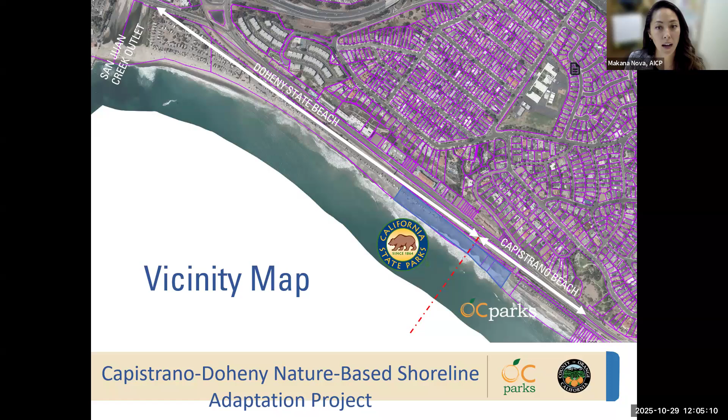So this is a joint project between the two agencies. There's also the San Juan Creek outlet that comes through here, so what comes through the watershed is outletted and comes down coast through this area. Finally, in blue, here is the project area. It's a 1,150 linear foot stretch of beach where this nature-based shoreline project is envisioned. The red shows the property line.

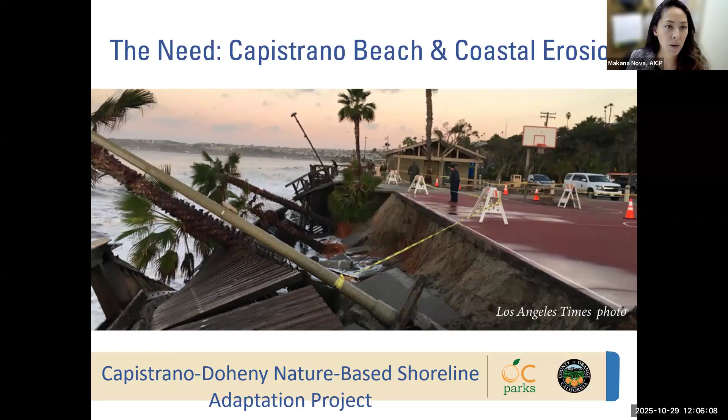And then here is the Nature-Based Shoreline Project area and what the erosion looked like back in, this is about 2021, 2022. You can see that there were some really beloved palm trees that have been lost in this area, and the amount of erosion that has occurred. This is looking southward in that area where we lost some parking. And then we also have storm drain facilities that were exposed due to this erosion.

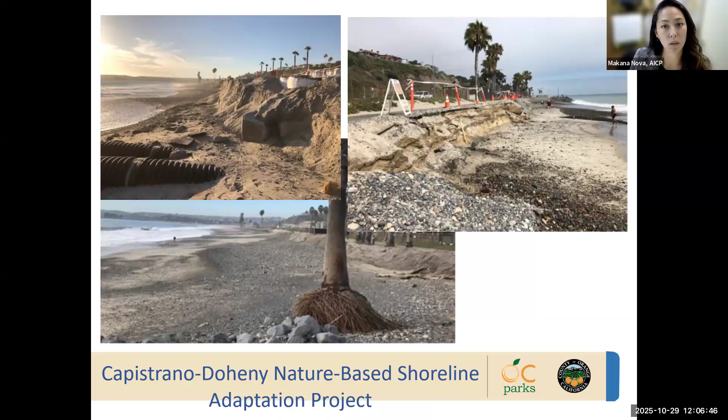So there's a lot of critical infrastructure through this area. I was just highlighting some of the storm drain facilities. You can see the parking lot in the aerial here. The main entrance comes down through Palisades Drive into Capistrano Beach. There is a pedestrian and bicycle path that is very well utilized that follows through this area down north into Doheny State Beach. And then we have the rail line, the LOSSAN rail line, and then Coast Highway behind it. So if this coastal erosion continues at its current rate, we stand to lose a lot of very critical infrastructure in this area.

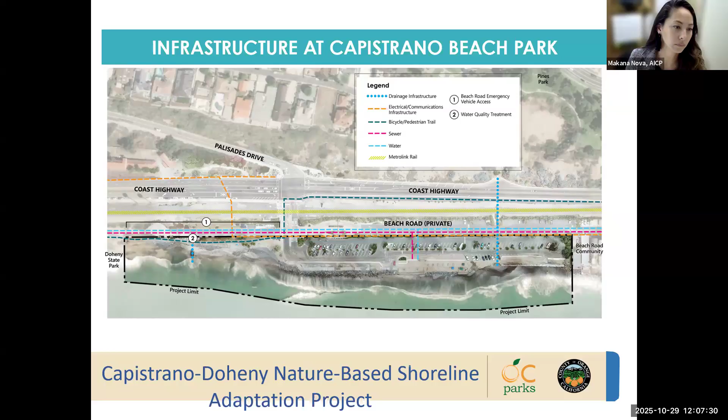Knowing that we need to look for a longer term plan, longer term solution, OC Parks embarked upon the Capistrano Beach Master Plan in late 2019 into early 2020. This process got put on hold due to COVID. So the outreach process was initiated, and luckily we were able to obtain a lot of community input during that time frame.

So ultimately, we started putting together this nature-based shoreline project and going forward with California Coastal Commission for a coastal development permit. I wanted to note real quickly on the master plan, that process, while it was put on hold in 2020, is envisioned to be completed by November of 2029. So the coastal development permit does lock us into place into completing that process and revisiting that.

So we have the input of the community. We're moving forward with this nature-based shoreline in the interim. Here's a quick look at what that pilot project looks like. It consists of a cobble berm covered by a living dune system. As I mentioned before, it's just under 1,200 linear foot length with that split jurisdiction.

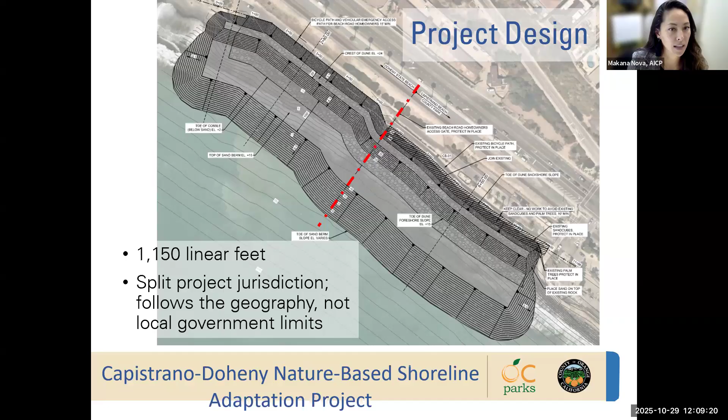So a number of technical studies were embarked as part of the coastal development permit process. Coastal shoreline trends, looking at the transport of sand down coast and up coast, has been an important piece of looking at whether this is the right location for the nature-based shoreline. Thinking back to the aerial view, we have a parking area and the beach is so eroded there, where it was once 100-foot wide, there's almost nothing, no width left at that point. The waves do crash right on shore at that point. In the interim, we do have riprap in place in that location. So it wasn't really the right place for the nature-based shoreline, that was studied at length.

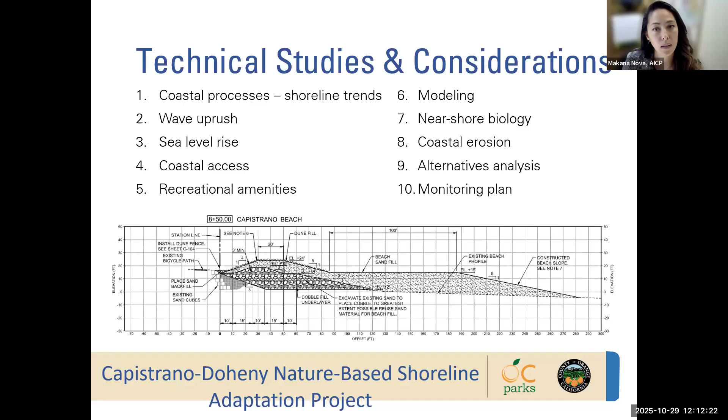We're seeking a nationwide permit 54 for living shorelines approval for that. So those are all in process.

Meanwhile, let's talk about funding. This project is anticipated to be total about a $20 million project. Right now, we're undergoing phase one, that's final design permitting, and that is fully grant funded. We're very happy to say we have a FEMA BRIC grant still funded through this phase one process because it had already been initiated before the BRIC program was canceled early in January this year. And then we also have, for our state and local match, we have SB1 funding through the Ocean Protection Council through the state.

So in the interim, you've seen some of the photos of a lot of the damage that has occurred at Capistrano and Doheny State Beach. We have been pursuing beneficial sand reuse projects over 2023 and 2024. In 2023, we placed 45,000 cubic yards at both beaches, and that really helped the interim condition. We went through Hurricane Hilary shortly after some of that sand was placed. And this sand has been beneficial not only to this beach area, but also as it enters the nearshore system, it has flowed down coast toward the private communities of Capistrano Bay District.

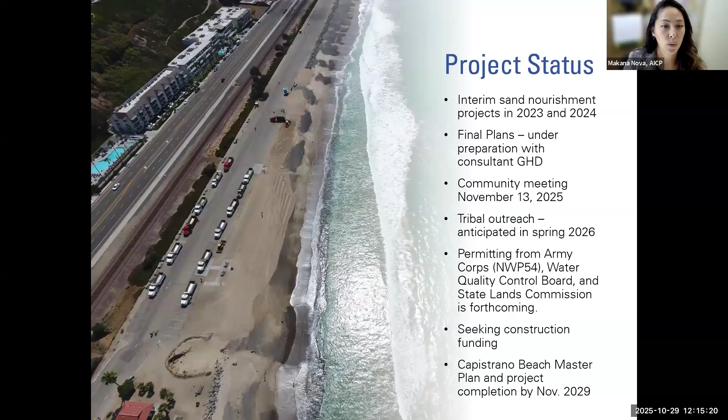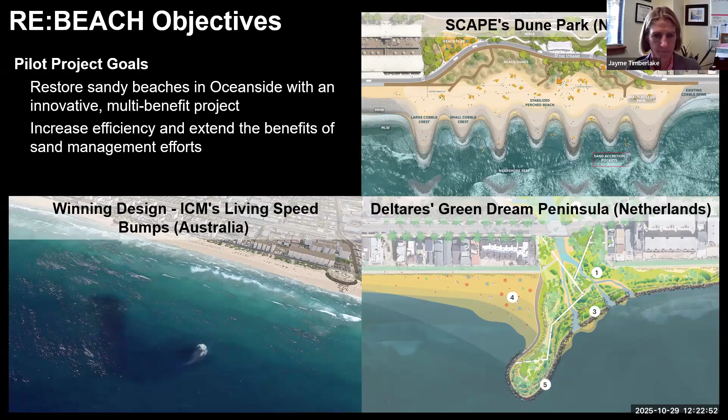Community involvement is very important, just like Makana was talking about. Throughout the design competition, we did several public workshops that were heavily attended by the community. Each time we had a design round, the public was able to come to one of these workshops and fully vet the design to date and give their input as to what they liked and didn't like about the design. So through each of the design rounds, we got closer and closer to getting what the community wanted to see.

Actually, the designs kept kind of merging as well - they kept getting closer and closer to one another. So we had to kind of orchestrate how the design competition was happening.

I'm going to show you a video in the next slide, which just shows how much interest the public had in this process. It also showcases how much outreach has helped us, because the next video is done by the BBC. The BBC took an interest in Oceanside's project and came to Oceanside and did interviews.

I was very reluctant to do this, but did it anyway for the good of the project. So I'll let that intro sit with itself. And here's the video.

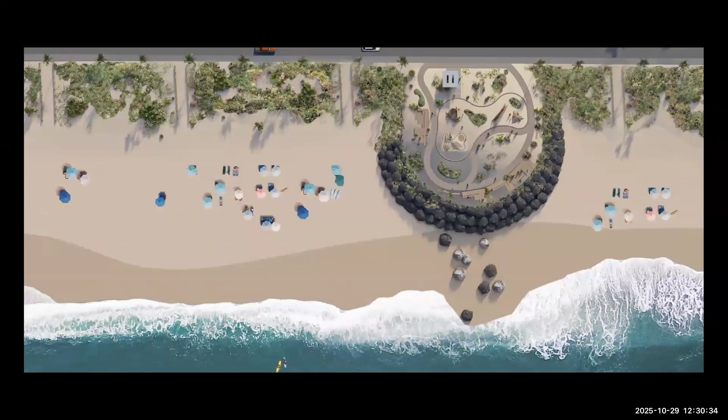One of the designs really addressed what the community was looking for. This design just really spoke the language of Oceanside, of just, hey, let's keep it a natural beach, as natural as possible, using these structures.

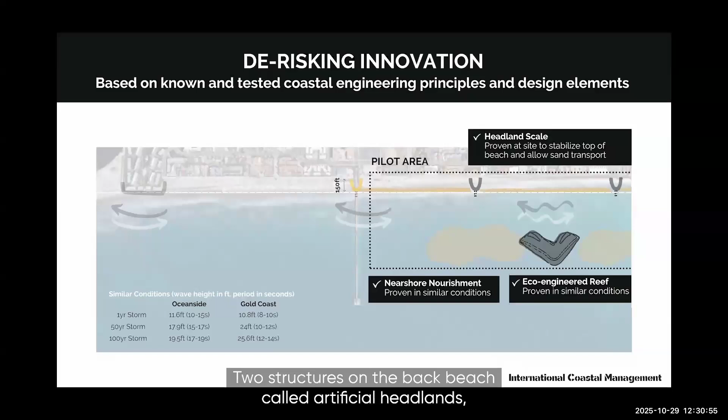This design concept comprised 3 different structures: 2 structures on the back beach called artificial headlands, and offshore between the 2 headlands will be a large artificial reef, submerged. What we hope that does is stop those large waves from directly hitting our shoreline and taking all the sand. It could provide the city and the region with a new coastal management tool that'll allow us to retain some sand on our beaches.

We thought it was a fantastic solution for Oceanside. We were all sitting there in the council chambers, and then it went to the vote. Motion approved, 5-0. Thank you.

Yeah, we were pretty excited. I mean, it was a standing ovation at City Hall, which I've never seen before.

It was a significant milestone in this whole journey. It was one of the best nights we had up there, for sure.

I think I felt proud and relieved, like we had worked our tails off and we got it across the finish line. And then it was like, let's do this, keep going, go, go, go. We got a lot of work to do now.

My focus remains on ensuring the project relies on scientific evidence, that it aligns with future-oriented coastal adaptation for sea level rise. I'm just glad that now we're all working together. It goes to show what can be achieved by being inclusive, being transparent, and working together.

So, yeah, the next steps—well, there's just a tidbit of some of the outreach that we've been doing since 2021. It's been extensive and continual. But next steps are really just to continue doing this engineering and design.

We're in final design right now, really looking at the reef shape and how the waves break around it. This slide came out a little funky, but we're also doing this very extensive baseline monitoring program, which is funded by the California Coastal Commission.

They will really want to see and make sure that our pilot project is well understood, especially since we are considering it a pilot project, and others like San Clemente are watching and seeing how it transforms, seeing if this particular design can be utilized in other areas.

And so monitoring it and making sure that it's implemented correctly, and the kind of repiloting and learning from the effort here, it's really important to the Coastal Commission. So they have given us some funds to augment that baseline monitoring program.

We've been doing continual outreach. We will continue to do outreach throughout this entire effort. And actually starting this week, we're starting our scoping meeting for our CEQA and NEPA document and our environmental compliance.

And then the fun part, trying to get all the funds together to fund this project. It's about $55 million at this point. So not something that the city can shoulder on its own exactly. So we're looking for different grants from State Coast Conservancy, from Prop 4, from Ocean Protection Council, from Department of Parks and Recreation.

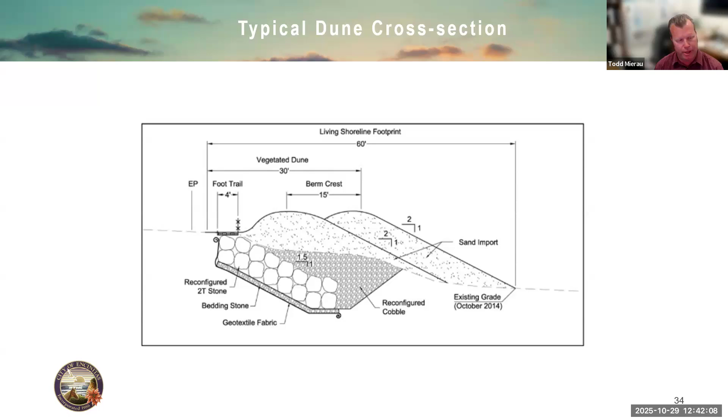So typically in January and February, the king tides, talking about a 7-foot high tide in depth, 6 to 8 foot swells, you see the inundation come right up to the toe of the dune. So it's essentially taking that sacrificial part away.

The dune system originally was designed about 60 feet wide. So we see it fluctuate to 60 to 30 feet in some sections, depending on the storm events.

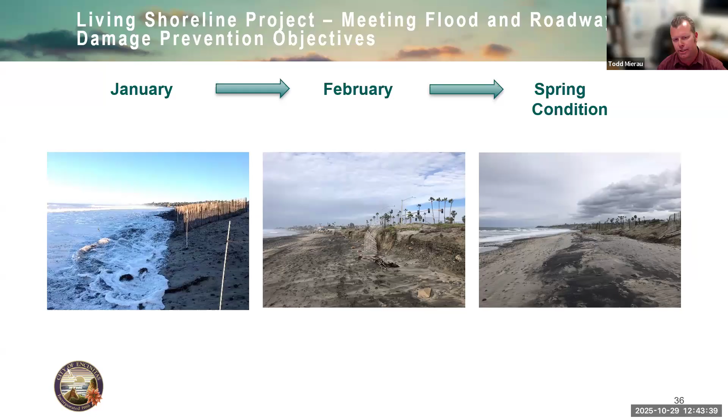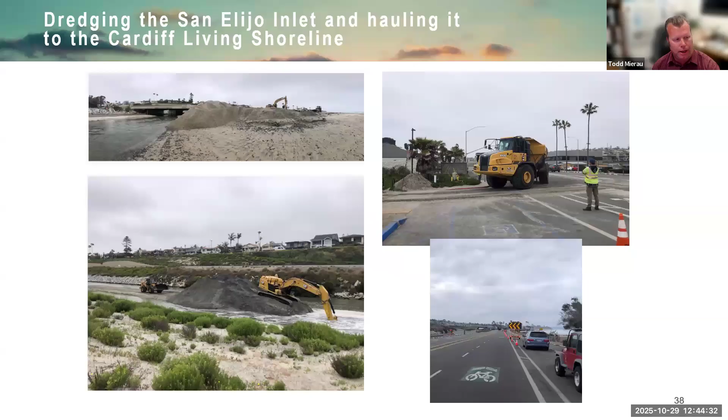The key thing with this project is we have an operation agreement in place between the City of Encinitas, California State Parks, and the Nature Collective, who's basically the lagoon manager of the San Elijo Lagoon. We also have funding source with the State Coastal Conservancy, and that basically allows access for us to maintain this thing long term, or in perpetuity essentially.

The bottom left photo, you can see us excavating the inlet, basically pulling out the sediment that was plugging up the lagoon you saw in those previous photos. We stack it outside on the westerly edge there along the inlet. And then we utilize rock trucks. They can carry about 33 cubic yards of load.

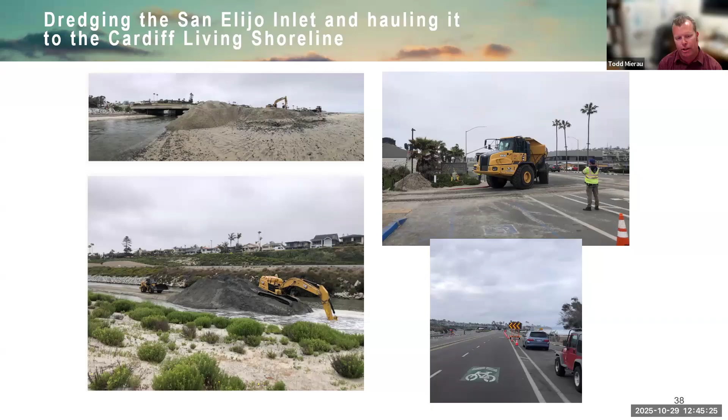If we have access on the beach, we'll do that. But many years, we haven't had access. We actually have to do traffic control plans and actually move them on the coast highway for a short distance and then back onto the beach.

To reestablish the sacrificial part of the dune, essentially we kind of back in those loads you can see there with the rock truck just going right up against the toe. Obviously, we use high quality sand. It's essentially the sand that you saw off the beach getting pulled into the inlet. So we're kind of accomplishing two goals, bringing tidal flow into the lagoon and rebuilding the beach at the same time.

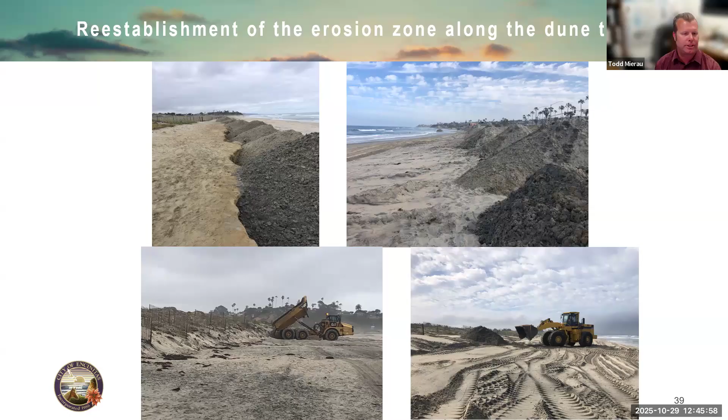While a large amount of sand dune erosion occurs over the winter seasons, the engineered aspects of the revetment wall for the entire linear project site have remained in place at least over the last 6 to 7 years. The Living Shoreline Project continues to be a very effective coastal design solution against significant storm and weather events along the frontage, largely due to the long-term maintenance and monitoring plan in place between the agencies involved, as well as having that consistent sand source at the San Elijo Lagoon. That's a key component. You can't look at it as entitling this, building it one time. You need to think long-term on how to manage it, to keep it there and keep it effectively there.

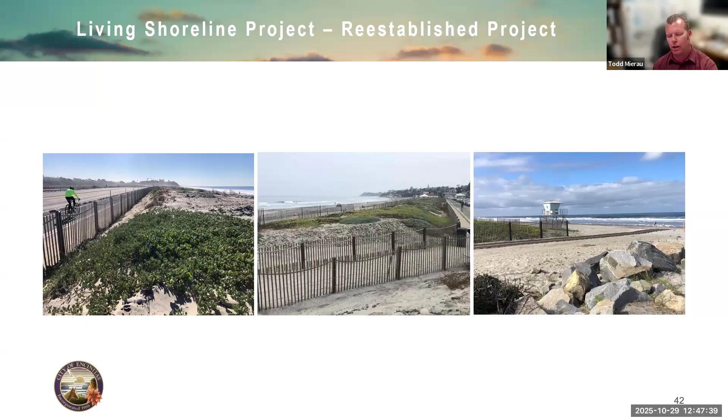Another recent project constructed in central Encinitas was the San Diego County, California project, also known in the industry as a coastal storm damage reduction project. Segment 1 is located in the city of Encinitas, extends approximately a mile and a half, about 7,800 feet, and was comprised of 340,000 cubic yards of material. Segment 2 is located in Solana Beach, going from Tide Beach Park to just north of the city of Del Mar limits, about 700,000 cubic yards of sediment.

The project was approved by the U.S. Congress last year and is a programmatic effort for proactive coastal resilience and bluff management, spanning 50 years through the year 2074.

The project is essentially a coastal storm damage reduction project spanning 2 separate jurisdictions, with goals to reduce coastal storm damage to property infrastructure along the city of Encinitas and city of Solana Beach shorelines and along the bluff top, prior to any emergency action being requested or required.

The project was designed to improve public safety by reducing the threat of bluff failures caused by undermining wave action against the bluff toe, by creating a beach berm in front of the bluffs that's wide enough and tall enough to help dissipate wave energy and storm surge before it hits the bluff face.

Lastly, the goal was to reduce the overall coastal erosion and shoreline narrowing in both study areas, which improves the overall recreation opportunities for the public and tourism, shoreline habitat, and life and safety access throughout the shoreline there.

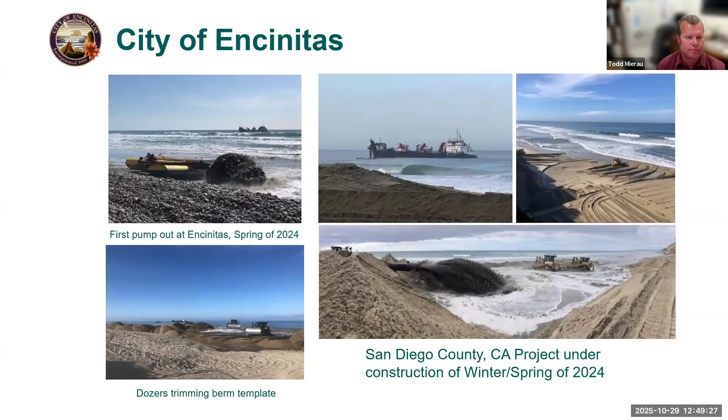Beach sand placement operations basically involved placing a pipeline, or a subline, through the surf zone to the beach in both Solana Beach and Encinitas. Due to the distance from the placement area, we had to use what's called a hopper dredge, a suction hopper dredge with pump ashore capability. You can see in the front of the bow there's a compressor that hooks up to a buoy system. Essentially, it pushes the sand through a subline that we sink on the ocean floor through approved environmental corridors, specifically to get the sand flowing onto the beach.

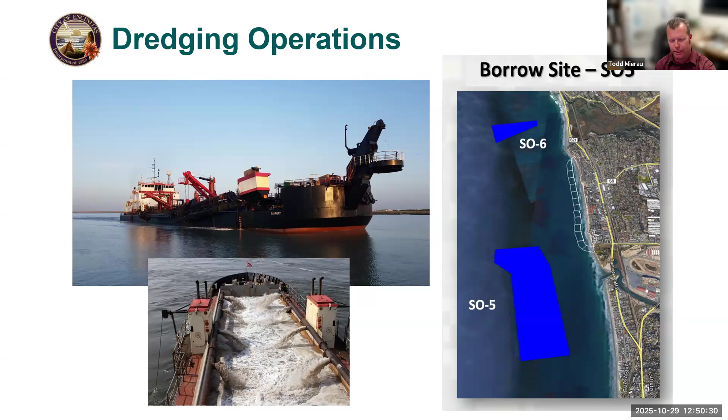Our borrow sites were just off of Del Mar, near the racetracks, about 2,500 feet offshore and beyond the depth of closure. Moonlight Beach, which was Encinitas's receiver site, was about 6 miles north. So it took about a 1 hour trip for the boat to go back and forth, excluding the pump out.

Due to extensive erosion along the entire reach in Encinitas, the berm pad had to be adjusted from 13 feet above mean low water to 15 feet. This was essential to cover up all the cobble that you can see in those photos from the recent winter storms of El Nino in 2023 and 2024. All the sand in this area had basically vanished, as you can see.

Additionally, the build is adjacent to 80 to 120 foot coastal sandstone bluffs, which are prone to sloughing and failure, creating a potential safety hazard with the heavy equipment rattling beneath them.

Let's see if this... lagging.

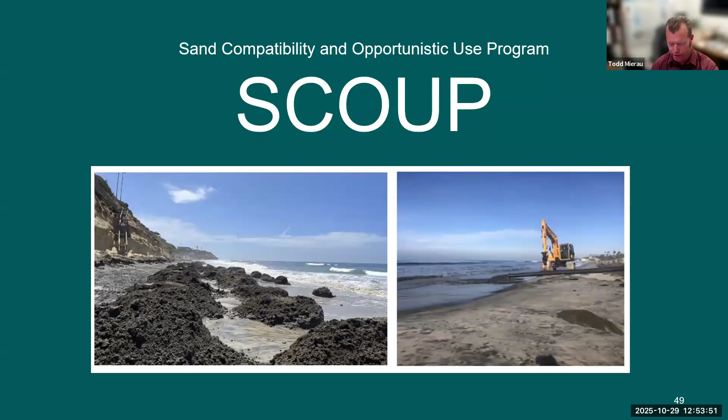So we're getting low on time, so I just wanted to cover SCOUP real quick. SCOUP, or the Sand Compatibility and Opportunistic Use Program, is part of a regional sediment management plan intended to streamline beach nourishment projects. The standardized permitting process facilitates the use of available sand from construction sites and other opportunistic sources. The program includes stringent environmental regulations to ensure sand sources are compatible with receiver sites. The timing and location of sand placement are strictly controlled to reduce negative impacts on coastal habitat and recreation. Generally speaking, this is something that can be leveraged in any coastal community, or even just outside one.

Basically, looking at a grading site, we analyze the geotechnical reports on an inland or upland site, look at the phase 1 and phase 2 environmental assessments to determine past uses with potential soil contamination, and cultural resources reports if there's any sensitivity. Then we look at the preliminary grading plans to determine overall export quantities, cut and fill, and the haul route for where the material is going.

A good threshold for cost-to-benefit ratio is about 10,000 cubic yards. With 10,000 cubic yards, we can essentially rebuild that entire living shoreline you saw — 2,900 linear feet of beach area. That's about 1,000 truck trips, at 10 cubic yards per dump truck coming off the site. So that just shows you the volume we're talking about.

From there, we go through all the agencies to determine if this could be viable. We go through the Army Corps, the Water Board, Coastal Commission, EPA, and the State Lands Commission for approval. We look at a sampling analysis plan, or SAP, to determine if we can match it to a beach location, and then there's a SAP-R, the results version. We also do a project notification report, which is a standard public notification process on how we're going to proceed.

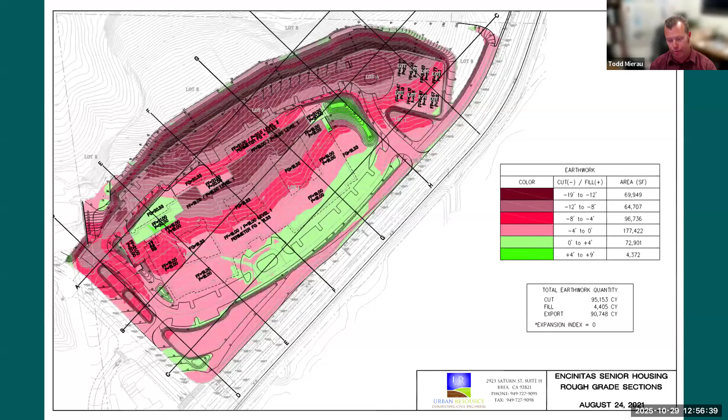Sediment placement can either be beach placement against a bluff or a roadway feature, as you saw in some presentations, or it can be an intertidal placement near the surf zone, which will naturally feather along the beach. It just depends on the needs.

That concludes my presentation. I'll turn it back to Michael for questions. Thank you, thanks for listening.

Thanks, Todd. Looks like we have a few minutes to squeeze in some questions. Looks like you guys have been busy typing answers during the presentations, which is great. Let's see, in terms of a few still outstanding: one question is whether any agencies have used this SCOOP program for small sand deposits, and whether there are any incentives for projects providing the sand other than conditions of approval.

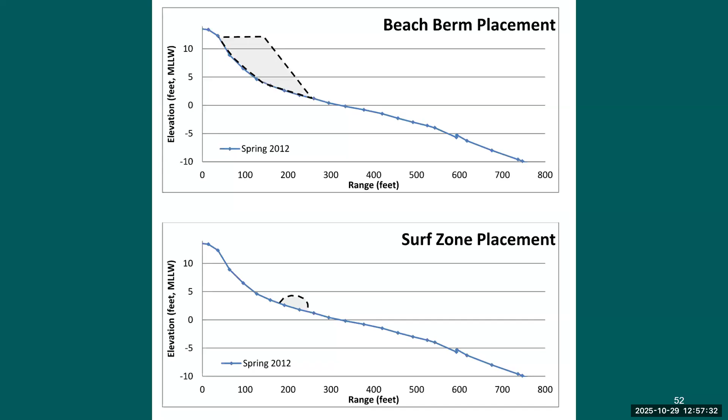I didn't hear it exactly, but for the SCOOP program, it depends. The way Encinitas is leveraging it now is within significant grading permit jobs — things that are, like I said, 10,000 cubic yards or more. The one you saw in the photo was actually 90,000 cubic yards, but we're only getting about 10,000 viable based on granule compatibility and chemical makeup, and previous use — taking the top layer of fill to the landfill, then actually using what would be quantified as sandstone on the beach. So I hope that answered the question.

Jayme, I don't know if you have any additional comments. Yeah, I can add on — SCOOP projects are super expensive and really hard to get done. We're doing one right now in Oceanside, with about 2,000 cubic yards of material. That's about the lowest I would go in terms of bang for your buck, because by and large, the sediment just moves off the shoreline swiftly, and we don't want to spend too much money on these efforts.

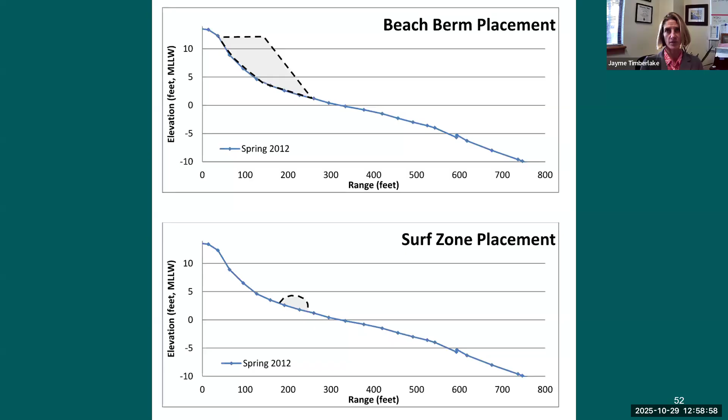But if your developer is really incentivized, if they cannot find a landfill for the material to go to, or they can't find a construction site that needs fill, they will be incentivized to work with you on getting your project to the beach, or getting their sand to the beach. But they would have to be heavily incentivized.

In Oceanside, we're just doing this project now, which is from the Front Wave Arena construction, done 3 years ago. We stockpiled the material, tested it heavily, submitted it to all the agencies for review and approval. Now, to prolong the life of the 2,000 cubic yards, we're putting it on the back beach only, not in the intertidal at all, so it acts like a berm. That might be one other thing to think about - where are you going to place it to prolong your investment? Thanks, Jayme.

I think that's a tough question, and I think we've attempted to answer in the chat - it's been asked a couple different ways. I think of projects like Banning Ranch, for example, where improved coordination with Coastal Commission staff and the developer landowner along the way really could have served to improve how that project may have turned out. It ended up being denied.